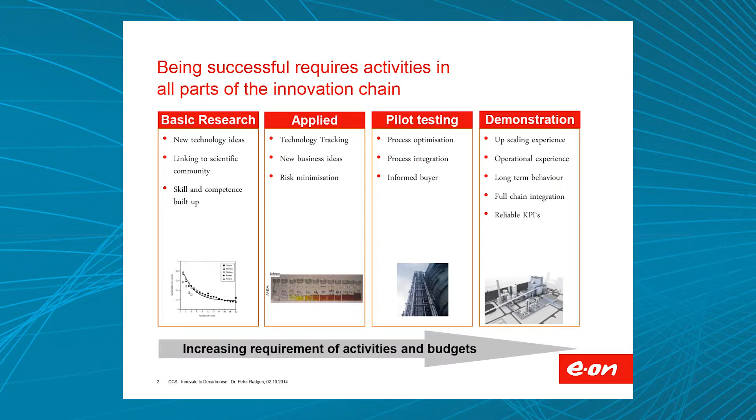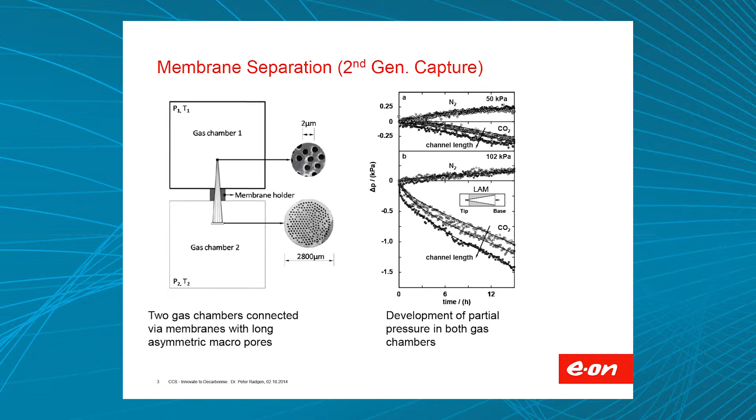And the challenge associated with it is, if you're doing basic research, typically you can do it at small scale, little number of people involved, so with acceptable cost, and the more you're moving to the right side to the demonstration, the more costly it gets. So what we are doing at E.ON is we're looking on a number of things. We are doing basic research, looking on second and third generation technologies. For example, membrane separation. Membrane separation in principle is well known, but there are a number of challenges in regards to the energy demand, the efficiency of the separation, and so on. But there are new ideas coming on the horizon which you need to test. So we are working on this.

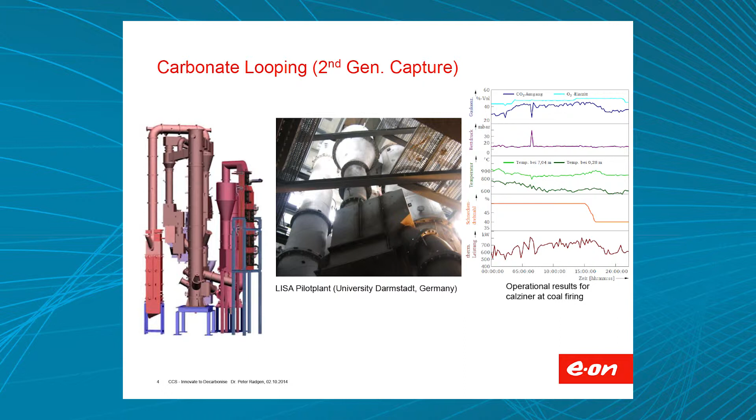We are looking also on things like carbonate, or sometimes called calcium looping technologies. So you're having a material, a solid bed, or two circulating fluidized beds, and you're running the process at very high temperatures. And the big advantage is, if you have a post-combustion plant, typically the recovery of the CO2 takes place at something like 130 to 150 degrees centigrade, and the waste heat is at about 100 degrees, so you can't do anything with it. In this kind of process with the calcium looping, the waste heat is available at 500, 600 degrees, which means you can bring it back into the steam cycle, and therefore you can reduce the overall energy demand.

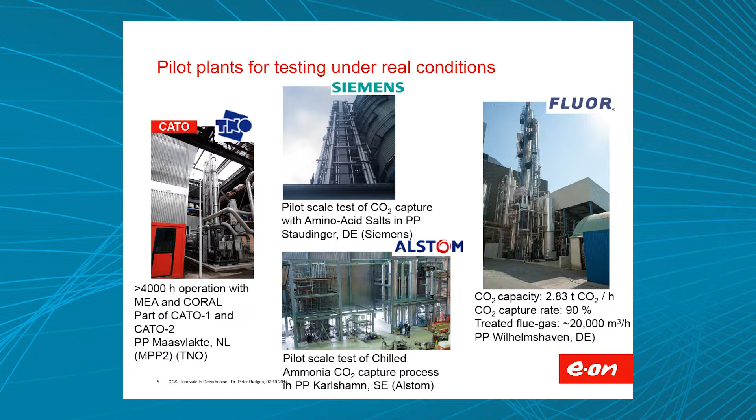When you're looking on these first generation technologies, for sure, we still need to reduce the cost in terms of CapEx and OpEx. So you need to look on where you might be able to have further improvements of the systems. And what we are, for example, doing is we are working on replacing the currently used structured packing column. Just like in desulfurization, we are trying to apply spray absorbers for CCS as well. And this has a number of advantages. It's getting your columns much cheaper, and you're reducing the pressure drop significantly, which saves you a lot of energy.

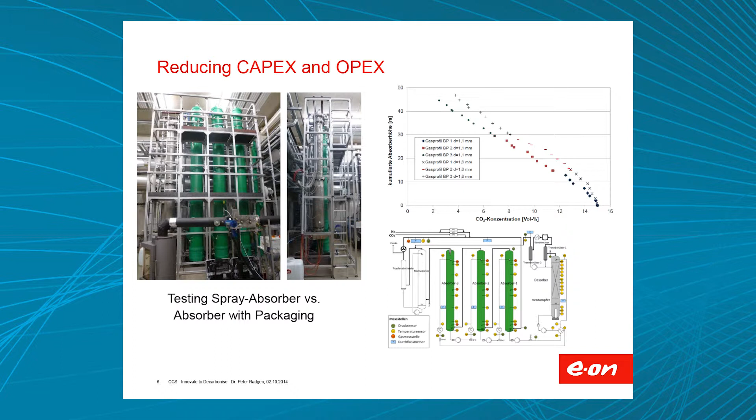And at least we are working on a large-scale demonstration project, even bigger than the Boundary Dam project. It's called the ROAD project, which stands for the Dutch acronym Rotterdam Opslag en Afvang Demonstratie project. It's a 250 megawatt slipstream of a 1,070 megawatt coal-fired power plant located in the harbor of Rotterdam. And it's a joint venture activity together with GDF. We have TAQA as a potential storage provider, and for sure we have financial support from the European Commission and the Dutch government.

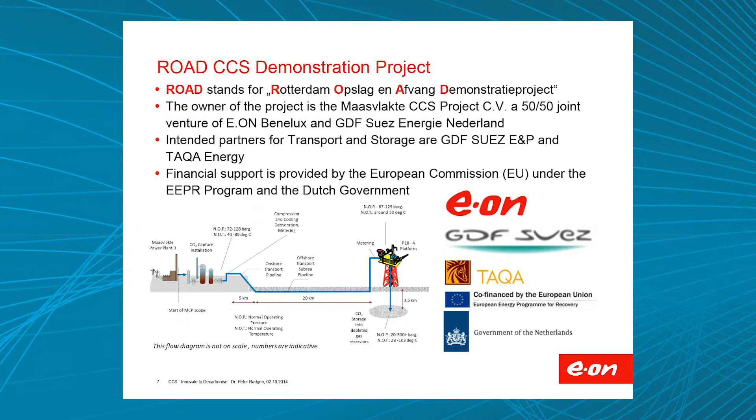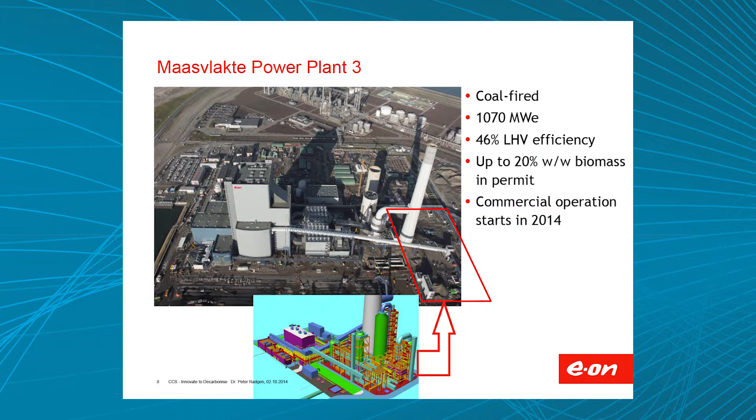How does it look like? You see on the slide the power plant. It's a new build, a large-scale power plant, which is starting commercial operation end of this year. And we have planned to have a CCS demonstration plant fitted in a slipstream of a quarter of the total flue gas.

Despite what you typically do when you're starting a project, you're doing a lot of FEED work, but we have done much more in this project. So we have really put hardware on this power plant. So what you can see here, we have implemented the flue gas tie-ins and the steam tie-ins so that we really would be able to retrofit the CCS facility easily into our power plant.

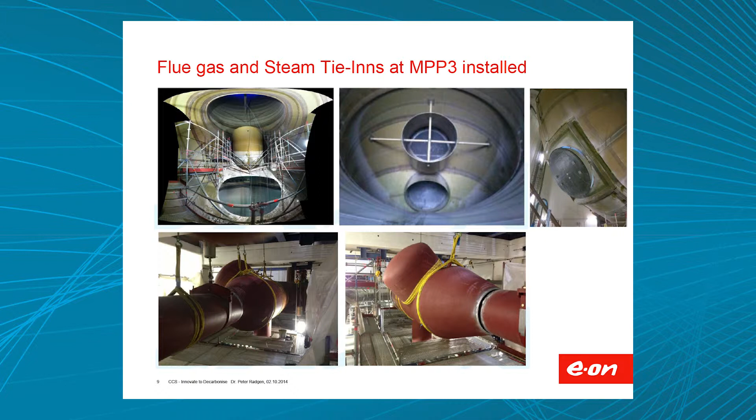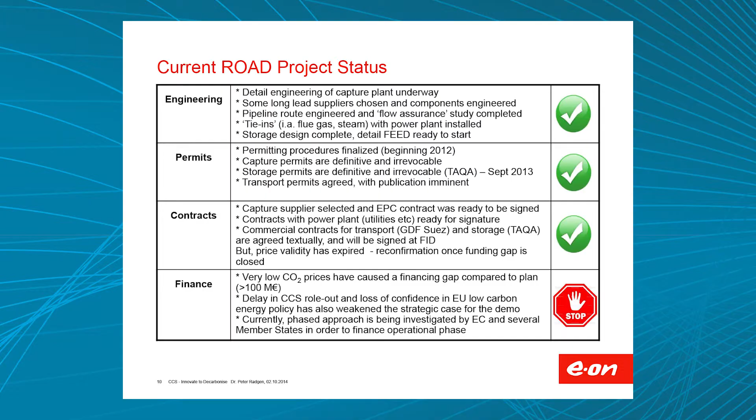So what are the challenges? We have run through the full engineering cycle. We have nearly completed the engineering. We have all the permits in place, which is sometimes challenging. It was the first storage permit ever granted in the European Union, which got approval by the EU Commission. We have the contracts negotiated, but the big hurdle is the financing. And we are facing a significant challenge in Europe, trying to get projects to be economic. There is no business case for CCS in Europe, which hinders all movement in Europe to drive CCS forward.

And what is the background? Why it's not economic? Well, we heard that EOR is one business driver for CCS. In Europe, we do not have EOR applications, so CO2 storage is only a cost. In addition, when we started all these project activities, and therefore I tell it like a fairy tale, once upon a time, there was the expectation that carbon prices in Europe, the key driver for economics of CCS projects in Europe, will go up from 30 to something like 50, maybe more euros per ton of CO2, but the opposite has taken place. So the price has fallen to values of something like 5 euros per ton. If you store 1 million tons of CO2 per year, this means you're losing, just by this carbon price reduction, 25 million euros per year on operational profit. Well, you're reducing the loss, not making a profit.

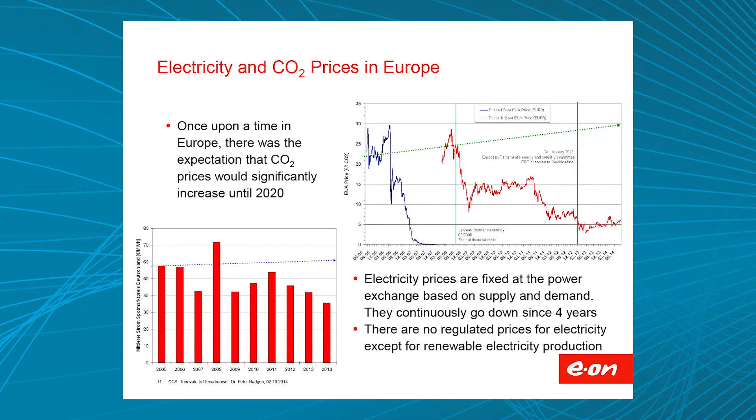The second effect we have seen is that electricity prices are heavily under pressure. We do not see any electricity consumption increase in Europe. The consumption is going down, and we see increasing renewable production, which puts a pressure on the electricity price. It's the market, supply and demand determines the price, and during the last 4 years, prices have fallen and fallen and fallen. So there is no appetite to invest at all in any power plant.

So CCS, where we are, where we go. What is the key question we have to answer? What is desirable for users? And I think everybody would agree we need to decarbonize. The second question we have to answer, what is possible with technology? And I think a very good achievement of Boundary Dam is that we can really demonstrate that the technology is working, it's efficient, it brings down the CO2 emissions of a power plant, it can contribute to the reduction of CO2 emissions. But in Europe, we need to make it also viable in the marketplace, which is not the case yet. So we need financial incentives to make it happen.

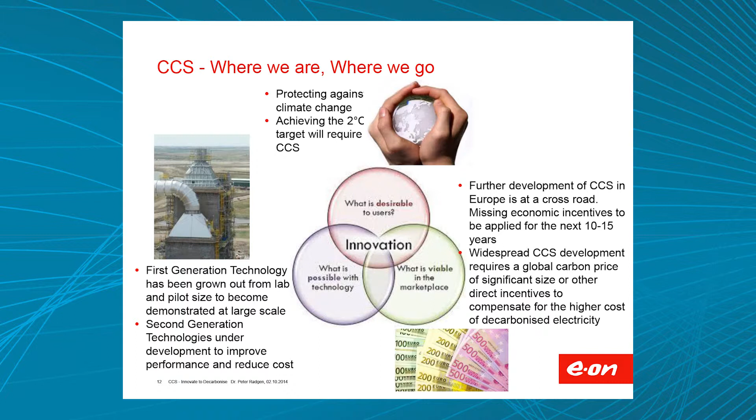Widespread CCS development requires a global carbon price, and I think it is important that Europe also looks at the competitiveness of the industry. So it's a global challenge which needs a global answer, and therefore we are all looking forward to the climate change negotiations next year in Paris. And I would like to close with a very famous German writer, Johann Wolfgang von Goethe, who has written, "It is not enough to know, it has to be applied. It is not enough to intend, it has to be done."

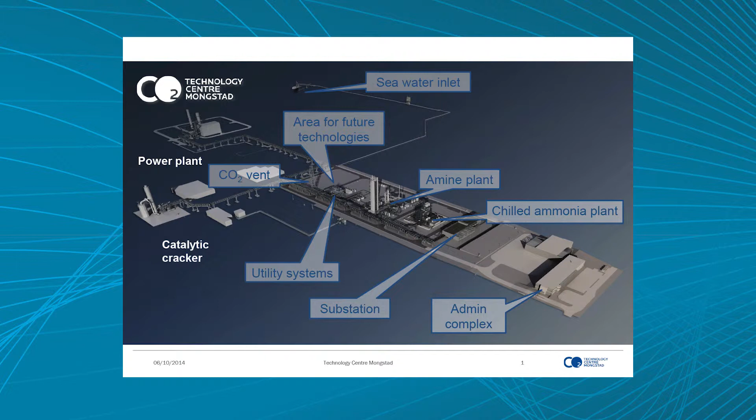TCM is, as most of you know, a large test center in Norway, where we have at present two capture units, test units. We have available area, we have a very flexible utility system, and we have access to two exhaust gas sources. One of the main plants is the amine plant. We have a large-scale test facility, and this large-scale amine plant has been used for tests first with Aker.

We have tested two different solvents, which have been developed by Aker. And we are really happy to say that these tests have been very successful. And Aker is now commercializing these technologies into the market, especially the market in the US on EOR.

We also performed, and this is very important, an extensive MEA test campaign with exhaust gas from the CHP, the gas-fired power plant. We have focused on emissions, on energy consumption and design, process optimizations, limitations. We think it is really important for the whole community that we can have a good baseline. What is the actual consumption? What is the actual cost involved with CCS? And all these results will be published in detail next week during the conference in Austin.

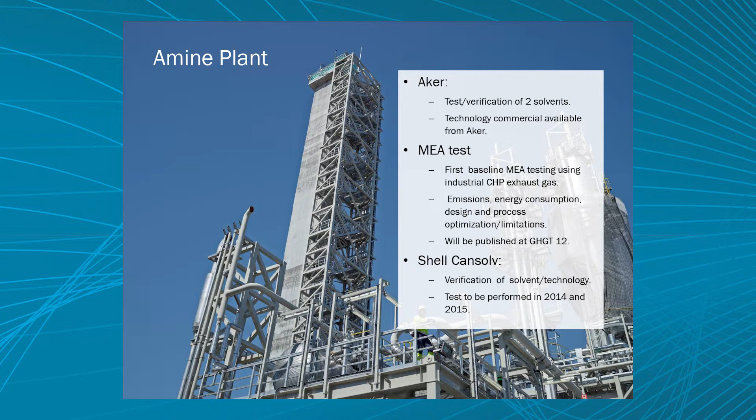What we are working on with TCM now is to prepare for the startup of a test campaign using the Shell Cansolv process. We are more or less ready to start, and that will happen within a short period of time. We will then go into a test phase where we will focus on performance and energy, for instance, and emissions and process verification in general. This test will be done in 2014 and into 2015.

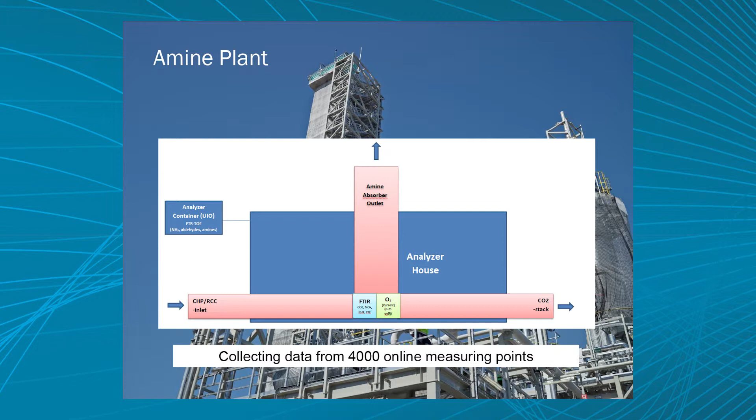If you look into the unit itself, it's a large-scale laboratory. We have approximately 4,000 online measuring points at site, and we are focusing a lot on getting a good mass and energy balance. This is the system which is installed at the top of the absorber to get the CO2 balance as good as possible.

One of the benefits with TCM is we are running with a plant, the gas-fired power plant, which is a baseload plant, so it's very, very stable. So we can run with this system, get good results, even if the system is going in a loop, which means that we are not getting the results every second, but we need a stable process because we are taking for one period of time from the exhaust gas coming in, another time from the exhaust gas going out, another time from the CO2 produced. This is working fine as long as we are stable.

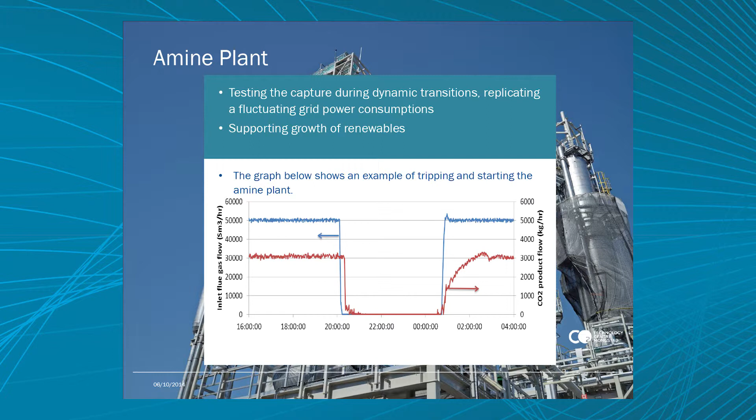But what we see now, and find more and more important, is the fact that we are entering into an era where the power plants are used more for peak shaving, and we are much more into a transient system. And the key for us is to understand how we shall operate an amine plant in a very dynamic process. So to be able to measure this, what you see here on the lower part is the results from a test we did, showing that an amine plant can be up and running in roughly two hours. But we would really like to know what the real performance is.

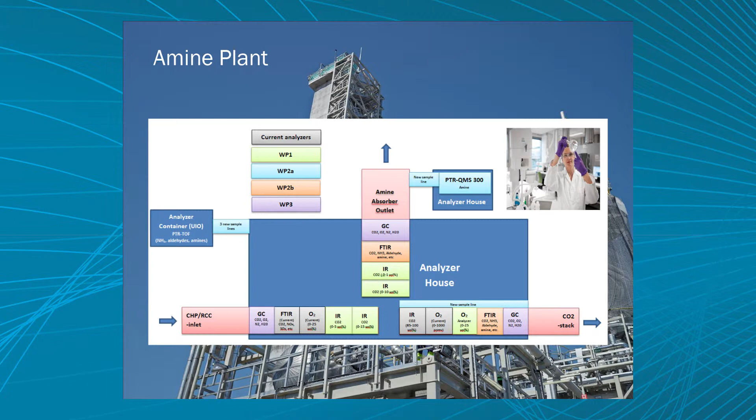So we have now close to finalized a major modification project, where we have installed a really large amount of new instruments, and also new sample lines, which means that we can now analyze this online, in real time, from the main sources. This will give us two things: an even better mass and energy balance, and at the same time the possibility to study the processes in transient operation, which we find very important.

But regardless of instruments, the laboratory is definitely very important. And we have a very good lab, which is handling more than 100 samples a day when we are in full operation. At TCM, we run roughly one test a day. But with this new instrumentation, we can also make the tests even more efficient. So then we know fairly well what's going on because we have good instrumentation. So we can compare it with models.

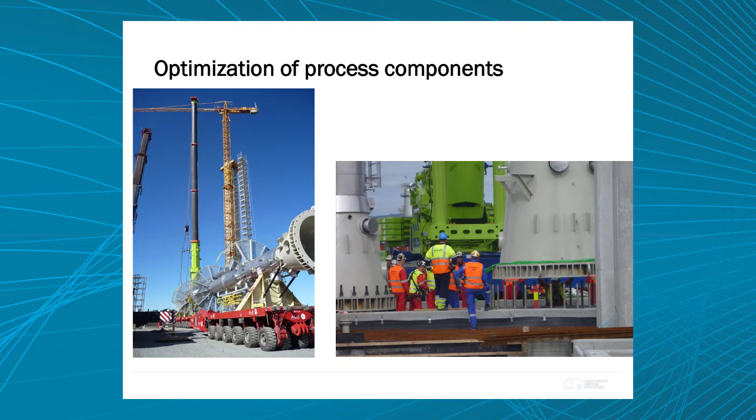Sometimes when you compare it to models, you find that you have some limitation in your process. What you see here is pictures of our strippers. These are industrial-size strippers. And what we have seen, and which we are also presenting in Austin, is that we had a bottleneck in the stripper due to the distribution of steam into the stripper. So it's very important not just to measure correctly, but to understand every process component and to make them optimized. So this is something we will continue to work with, because what we are doing now is looking into the future activities at TCM.

And what we would like to do is to test, of course, mature technologies with limited modifications, but we would also like to go into more novel solvents and processes. And we think to be able to really test new solvents, novel solvents, we really need to understand the amine process in basic. That is why we are doing the investments we are doing at present, to be prepared to be a good test center for novel solvents, so we can get high quality and good results as fast

as possible. Another thing which is important is that an amine plant, for instance, consists of a large number of components. And we are also very interested in testing out different process components. It can be demisters, packings, heat exchangers, all kinds of instrumentation to make sure that we have a totally optimized process, which can also handle the transients.

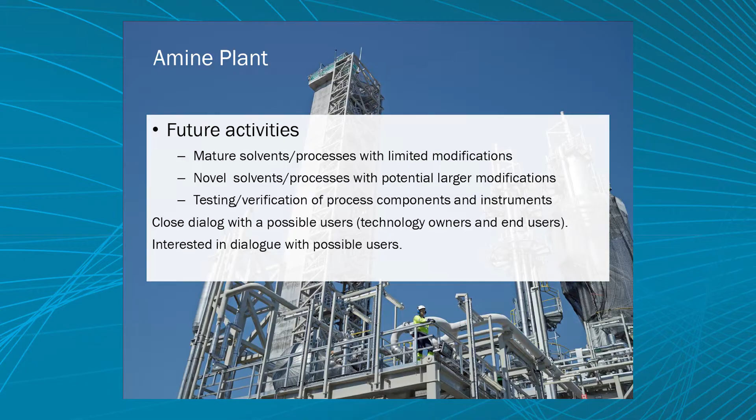So TCM is at present in a close dialogue with possible users, technology owners, and I think what will be important in the future is that we will get closer into dialogue with the end users. Because it's the end users like SaskPower which have the problem if it's not really working. And TCM is a very good place to do troubleshooting and also to do training of operators and to make sure that the process will work as it should. And of course, we are interested in a continuous dialogue with possible users.

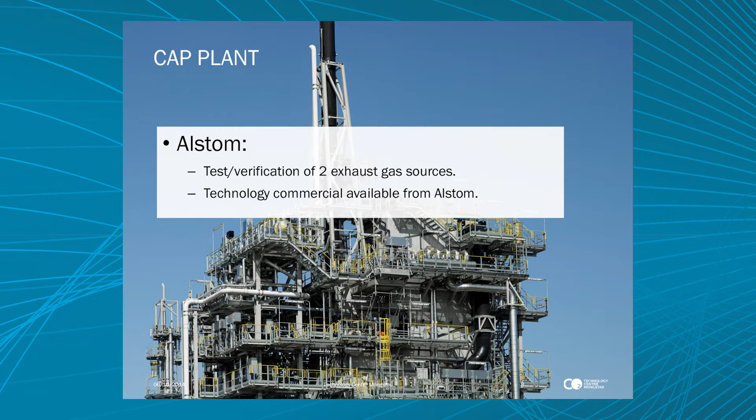The CAP unit, we also have a big chilled ammonia plant. We have been testing now together with Alstom since late 2012. We have tested it for 2 exhaust gas sources. We have had lots of troubleshooting, we have done modifications, and we have solved issue by issue in a very good dialogue with Alstom. And we're very happy that Alstom is now going to the market and selling this chilled ammonia process, especially against the EOR market in the US.

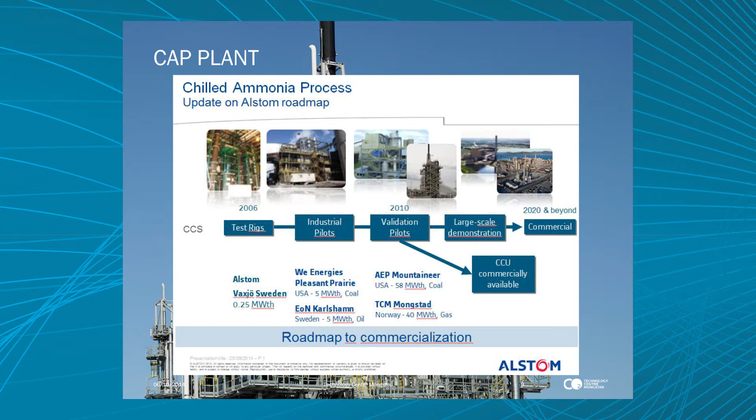This is something I got from Alstom, showing the roadmap for the chilled ammonia. I mean, they started their work in 2005, I think, in the university. Then a big company like Alstom came into the process. They got with them funding, they got with them other industry partners, and they have been doing a very fast track development. But to develop these types of technologies, it takes time.

But I think what is good now is that since 2006 until today, a number of test centers have been developed and are in operation, like NCCC in the US, like what we have here with SaskPower and the TCM in Norway, for instance. So now we have the infrastructure in place, which can possibly cut down on the development time.

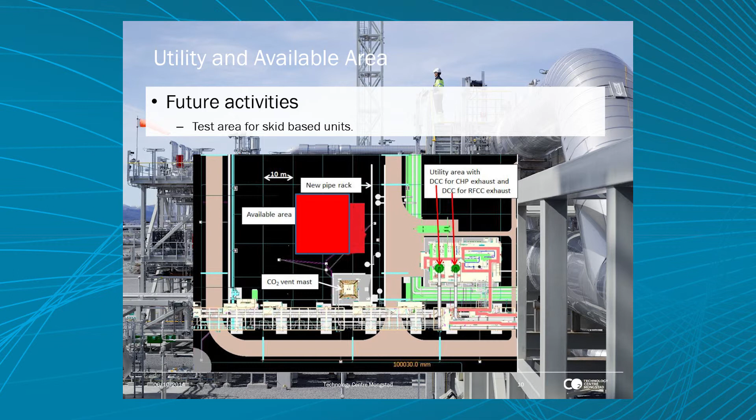At TCM, we have a big utility area. What you see here is the module where we are adjusting the temperatures of the exhaust gases. And we also have an available area. And this available area is a place where we would like to test out the skid-based units. So far, we have been doing studies with some technology owners, looked into the possible tie-ins for how we can do it. How can we get the needed flexibility with our 2 exhaust gas sources and all the utilities?

But what is also important is that we have already an available parking space for a module. This is the place where we had installed the mobile test unit from Aker, which has also been tested out at NCCC. So we have an available test space where we can install units. Our job at TCM is to reduce cost, technical, environmental, and financial risks by implementing full-scale CO2 capture units. So what we have been doing is that we have 2 RFIs out. So we are in dialogue with people that are interested in the amine plant and the available site.

I think we have a very important test center network where also SaskPower is a partner. TCM owners, which are Statoil, Shell, Sasol and Gassnova, also have a very good network within the CCS activities. We've also been doing a technology survey. SINTEF did a tremendously good job and made a report, which is available at TCM's homepage, where we study different technologies.

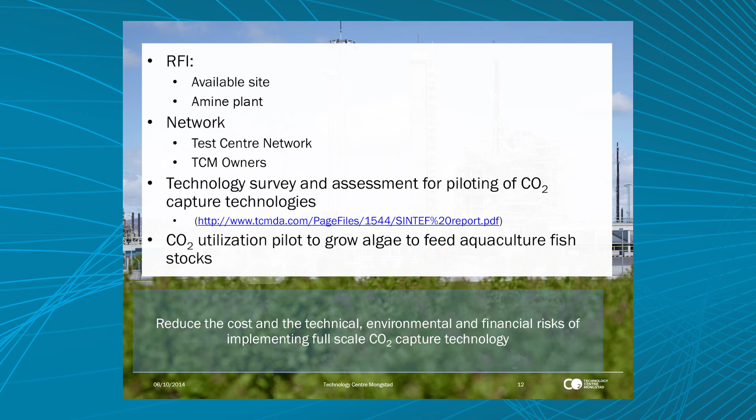And TCM is also moving into utilization. In Norway, fish farming is a big industry. The second after oil and gas is fish farming. And we are now looking into, and we will install, a pilot plant where we will grow algae based on the use of CO2 and light.

So TCM is there. We have been doing some good tests. We are very happy that the companies we have been testing for are happy with the work and that they are going commercial with the technologies. We are very happy that we will start up the new test now with Shell Cansolv. We're sure that will be successful. We are modifying the plant to be ready for the challenges which we know will come, and we are still open for dialogue with possible users.